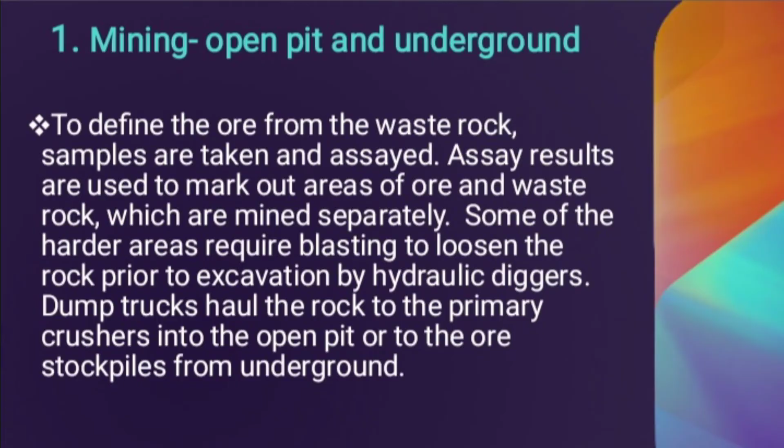The process of mining. First one is mining, open pit and underground. To define the ore from the waste rock, samples are taken and assayed. Assay results are used to mark out areas of ore and waste rock, which are mined separately. Some of the harder areas require blasting to loosen the rock prior to excavation by hydraulic diggers. Dump trucks haul the rock to the primary crushers into the open pit or to the ore stockpiles from underground.

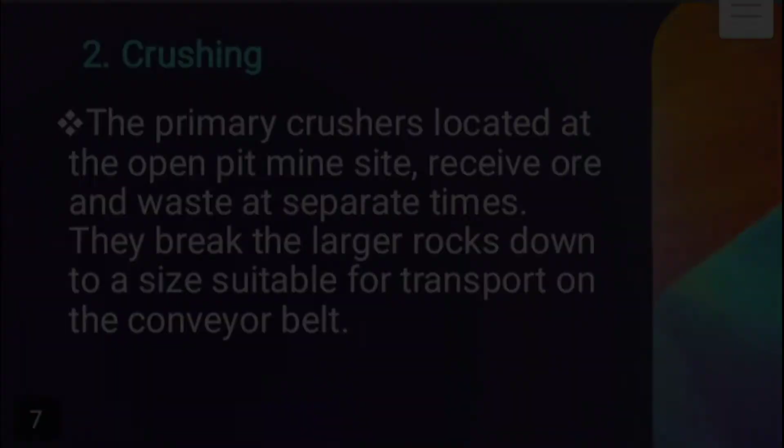Second one is crushing. The primary crushers located at the open pit mine site receive ore and waste at separate times. They break the larger rocks down to a size suitable for transport on the conveyor belt.

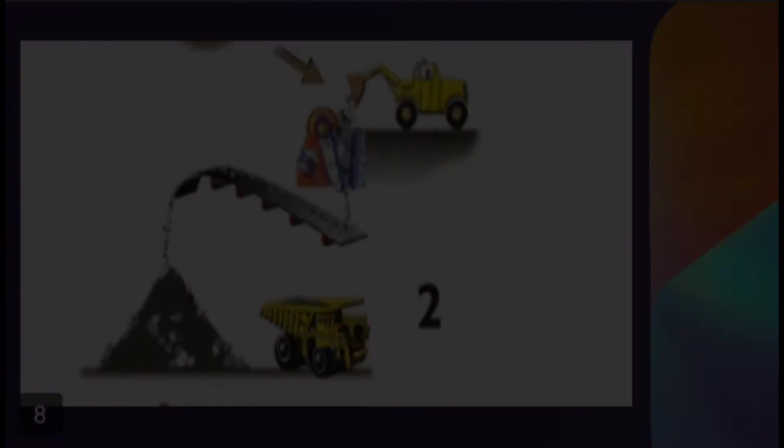Third one is transport. A rubber-belted conveyor transports the ore and waste rock from the open pit, approximately 2 kilometers, via a tunnel through Union Hill to the mill and waste rock embankments. Large electromagnets remove any steel debris excavated from the old Martha mine workings.

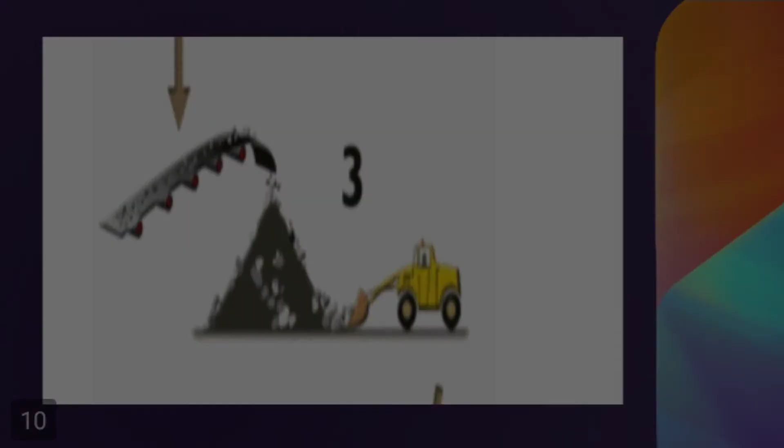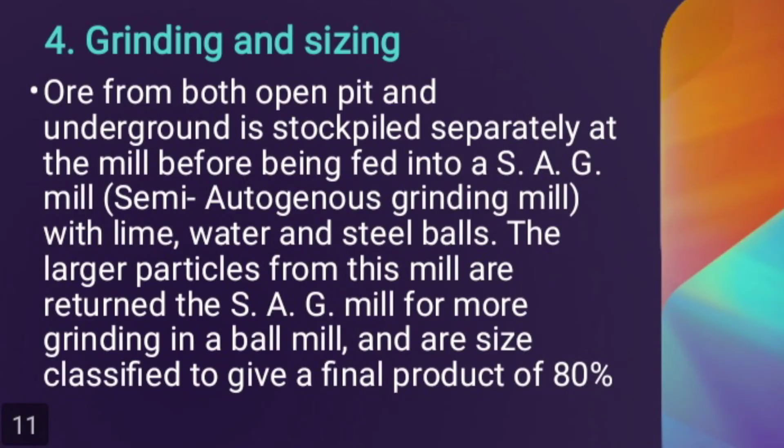Fourth one is grinding and sizing. Ore from both open pit and underground is stockpiled separately at the mill before being fed into a SAG mill with lime, water and steel balls. SAG is an acronym for semi-autogenous grinding. The larger particles from this mill are returned to the SAG mill for more grinding in a ball mill and are size classified to give a final product of 80%.

Five is leaching and adsorption. A slurry of ground ore, water and a weak cyanide solution is fed into large steel leach tanks where the gold and silver are dissolved. Following this leaching process, the slurry passes through adsorption tanks containing carbon granules which adsorb the gold and silver. This process removes 93% of gold and 70% of silver.

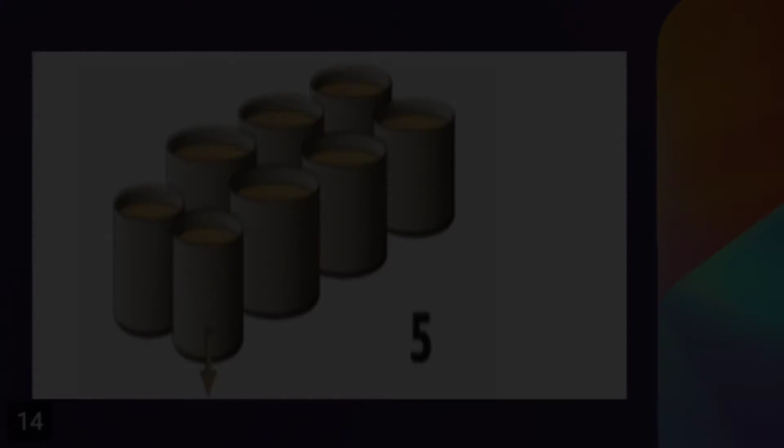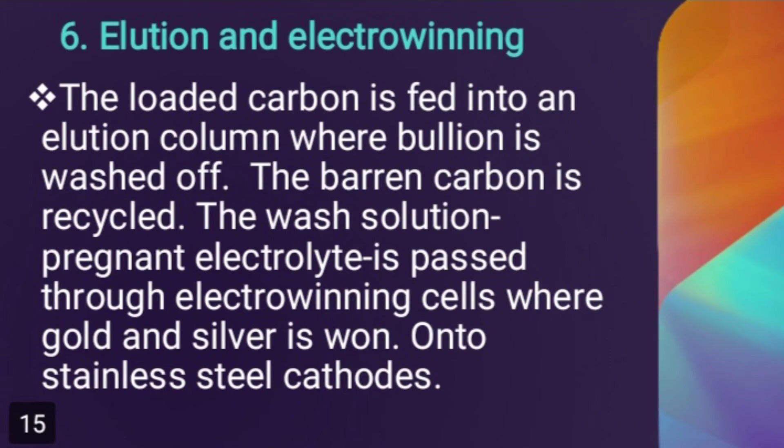Six is elution and electrowinning. The loaded carbon is fed into an elution column where bullion is washed off. The barren carbon is recycled. The wash solution, pregnant electrolyte, is passed through electrowinning cells where gold and silver is won onto stainless steel cathodes.

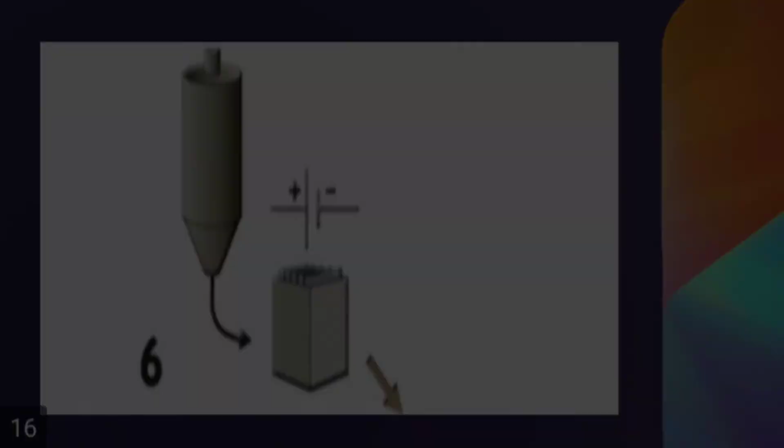Seven is bullion production. The loaded cathodes are rinsed to yield a gold and silver bearing sludge which is dried, mixed with fluxes and put into the furnace. After several hours, the molten material is poured into a cascade of molds producing bars of bullion.

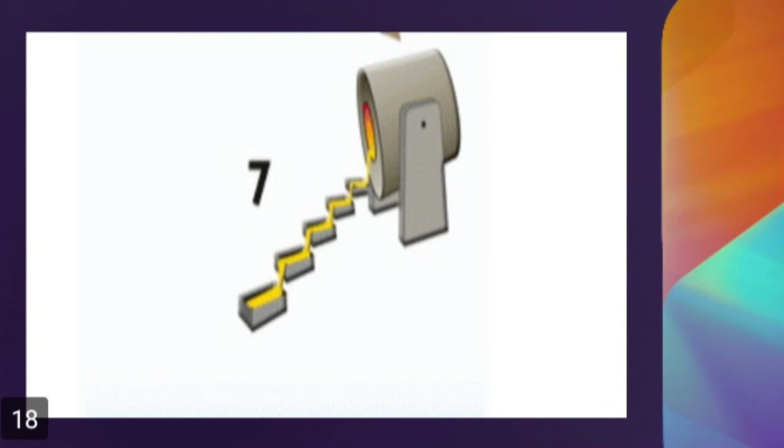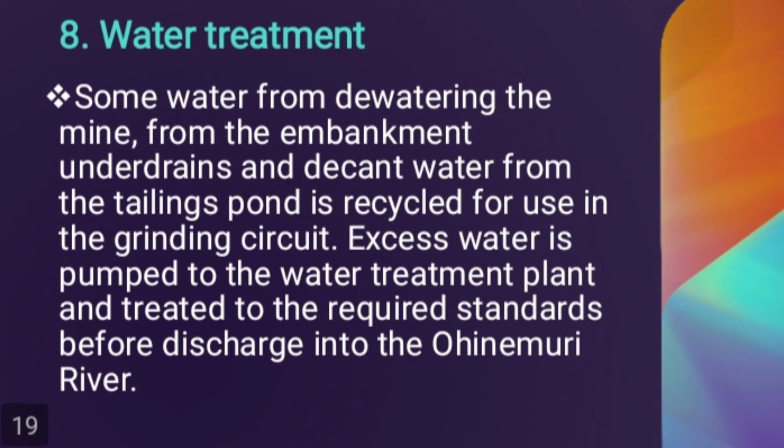Eight is water treatment. Some water from dewatering the mine, from the embankment under drains and decant. Water from the tailings pond is recycled for use in the grinding circuit. Excess water is pumped to the water treatment plant and treated to the required standards before discharge into the Ohinemuri River.

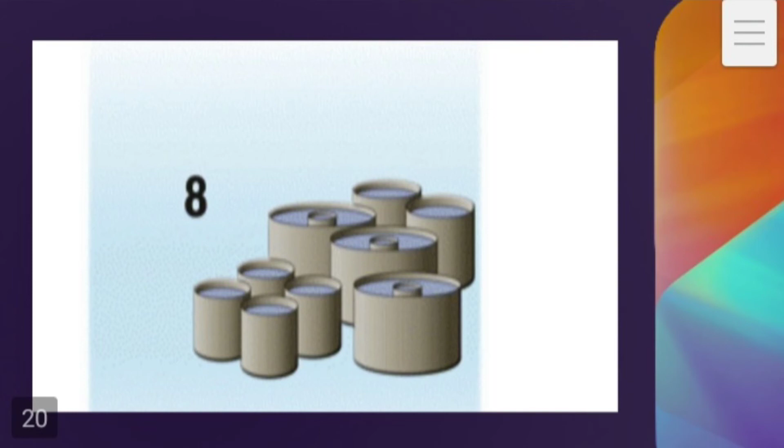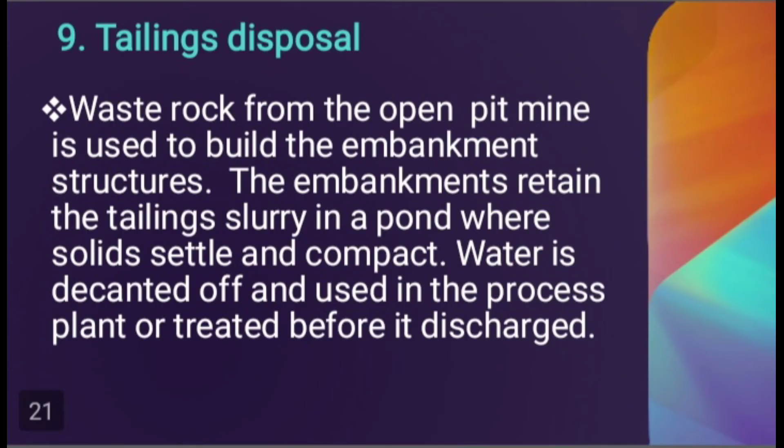Nine is tailings disposal. Waste rock from the open pit mine is used to build the embankment structures. The embankments retain the tailings slurry in a pond where solids settle and compact. Water is decanted for use in the process plant or treated before it is discharged.

So this is the process of mining. First one is mining, open pit and underground; this is to define the ore from the waste rock. Second one is crushing, the primary crushers located at the open pit mine site. Third one is transport; a rubber-belted conveyor transports the ore and waste rock from the open pit. The fourth one is grinding and sizing. Ore from both open pit and underground is stockpiled separately at the mill before being fed into a SAG, or semi-autogenous grinding mill, with lime. The fifth is leaching and adsorption. A slurry of ground ore, water, and a weak cyanide solution is fed into large steel leach tanks where the gold and silver are dissolved. Number six, elution and electrowinning. The loaded carbon is fed into an elution column where bullion is washed off. Seven, bullion production. The loaded cathodes are rinsed to yield a gold and silver bearing sludge, which is dried. Number eight, water treatment: some water from dewatering the mine. And nine, tailings disposal, which is waste rock from the open pit mine used to build the embankment structures.

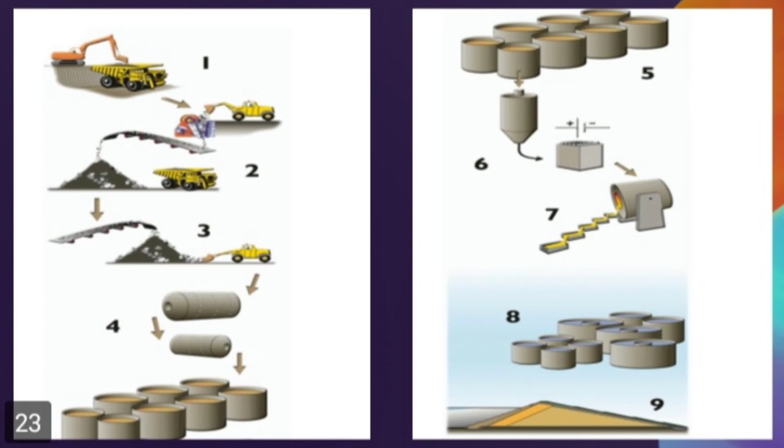Digging deeper: mining methods explained. Open pit, underwater, and underground mining are the three main methods of mining we use to extract our products from the ground. In this Digging Deeper article, we take a look at these different methods and provide a glimpse into what each involves.

Number one, open pit mining. Open pits, one of the most common mining methods, start from the Earth's surface, maintaining exposure to the surface throughout the extraction period. The excavation usually has steps to ensure the safety of the miners and a wide ramp where equipment can travel, allowing the product to be removed efficiently from the site.

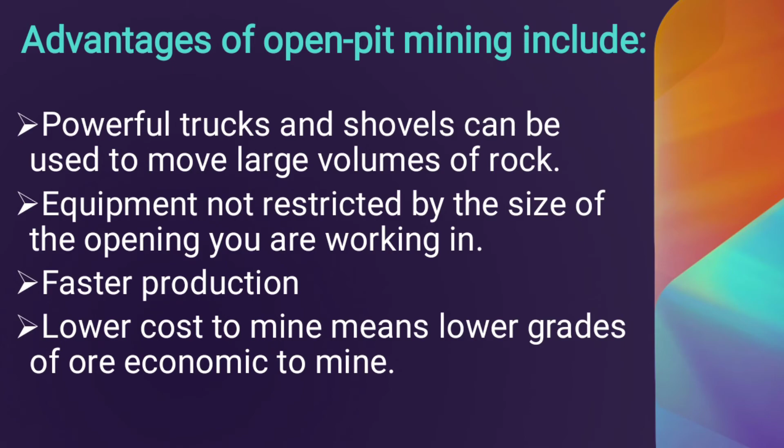Underground mining is used to extract ore from below the surface of the earth safely, economically, and with as little waste as possible.

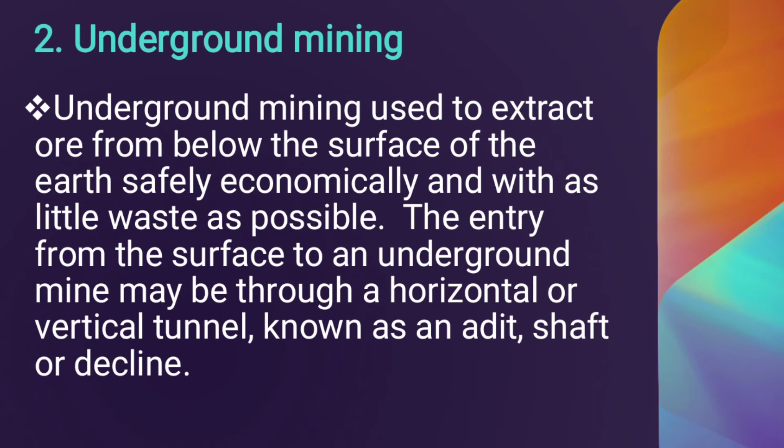The entry from the surface to an underground mine may be through a horizontal or vertical tunnel known as an adit, shaft, or decline.

Underground mining is practical when the ore body is too deep to mine profitably by an open pit, when the grades or quality of the ore body are high enough to cover costs, and it has a lower ground footprint than pit mining.

What is underground mining? The underground mining methods used include room and pillar, narrow vein stoping, and large-scale mechanized mining.

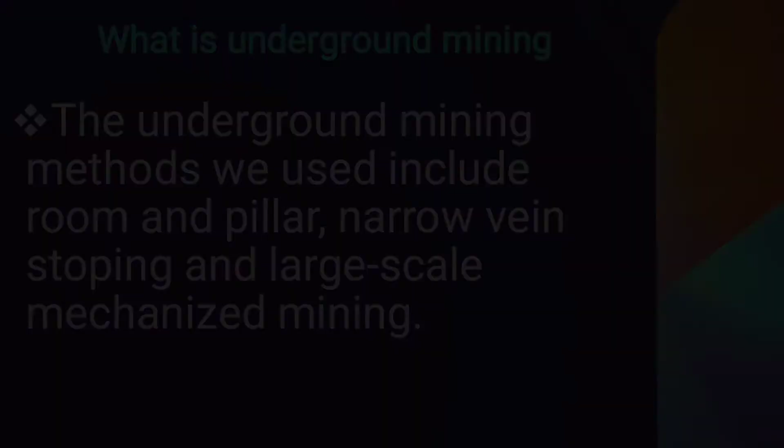Room and pillar mining is a style of mining where tunnels are driven in a chessboard pattern with massive square pillars between them, which are gradually cut as the work proceeds. We use this for coal mining.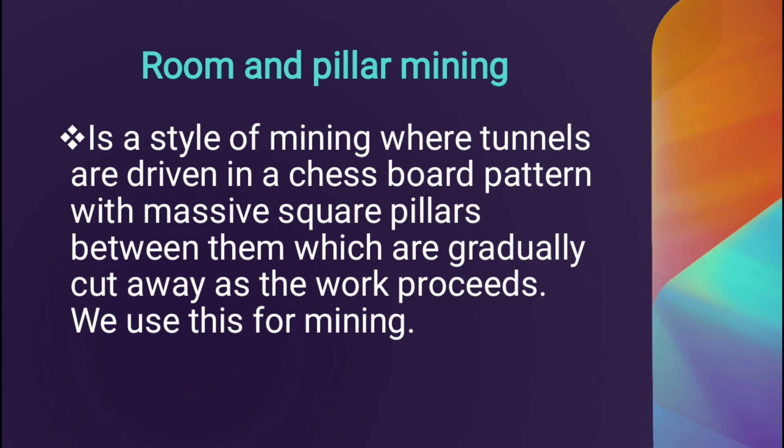Narrow vein stoping is performed in an underground excavation along geological veins, distinct sheet-like bodies of crystallized minerals within a rock, where the minerals are mined and removed.

To support underground mine stoping, we also have to make excavations for engine rooms and pump chambers, or for access purposes, such as shafts, drives, winzes, and raises. We use this for mining platinum.

Large-scale mechanized mining includes long wall mining, where a long wall of coal is mined in a single slice, usually by a large machine.

Sub-level caving, where levels of the ore are blasted by explosives. Block caving, where large areas of the ore body are blasted and extracted with the assistance of gravity.

Underwater mining is necessary when the product you've identified is located within an aquatic environment like the seafloor. It's a unique challenge, one that requires a responsible approach that thoughtfully considers the local ecosystem.

We conduct underwater mining with purpose-designed ships using either a remotely operated underwater vehicle or drill technology, at depths of 100 to 400 meters below sea level.

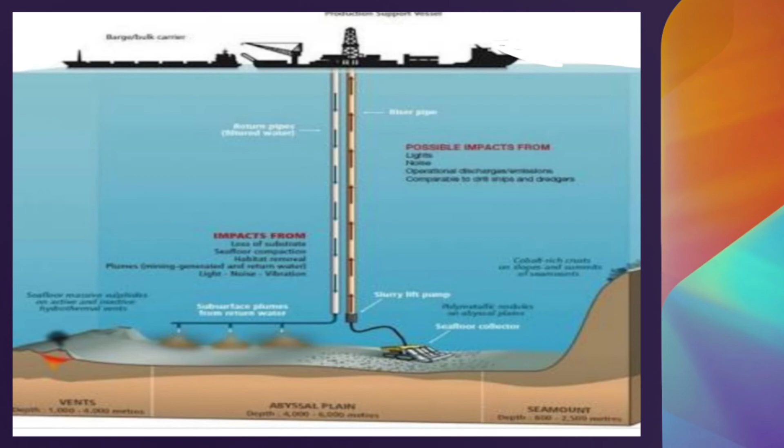In situ leaching is also called in situ recovery or solution mining. It is a mining process used to recover minerals such as copper and uranium through boreholes drilled into a deposit.

It works by artificially dissolving minerals occurring naturally in a solid state.

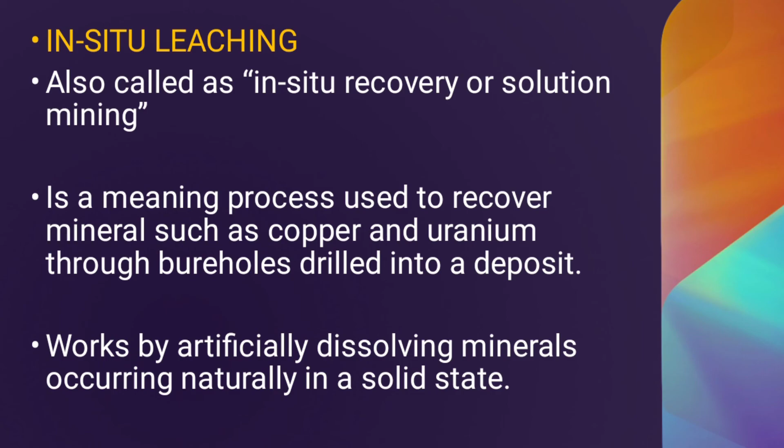Milling is the process of grinding, cutting, pressing, or crushing a material in a special machine. It is a process that can be done with a wide range of machine tools, using rotary cutters to remove material by advancing a cutter into a workpiece.

It is also known as fine grinding, pulverizing, or comminution. It is distinct from crushing or granulation, which involves size reduction to a rock, pebble, or grain size.

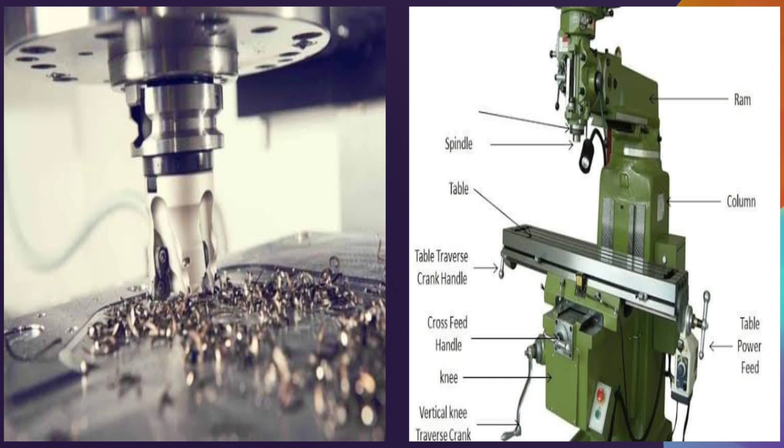What are the methods of milling?

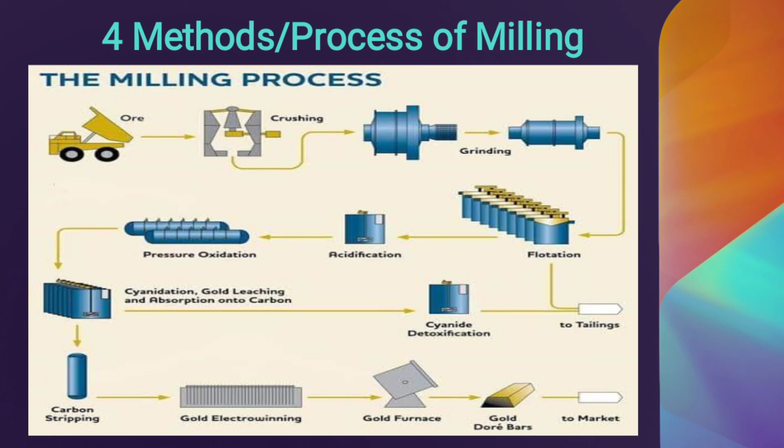String milling is quite similar to single-piece milling, but the only difference is that instead of a single piece, there are several parts which are simultaneously fixed and worked upon.

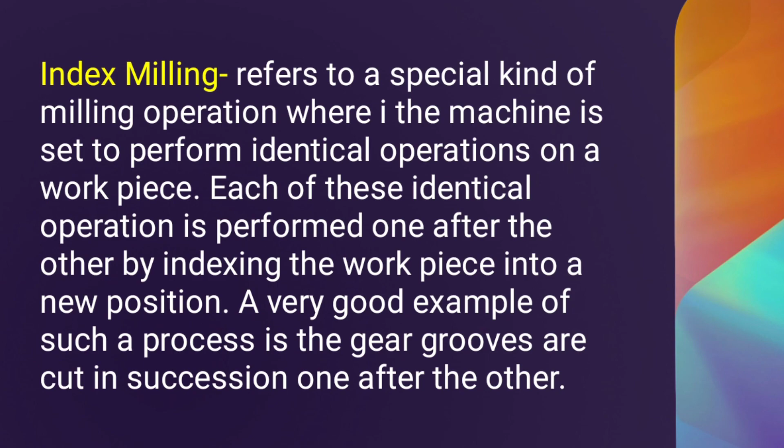Index milling refers to a special kind of milling operation wherein the machine is set to perform identical operations on a workpiece. Each of these identical operations is performed one after the other by indexing the workpiece into a new position. A good example is where gear grooves are cut in succession, one after the other.

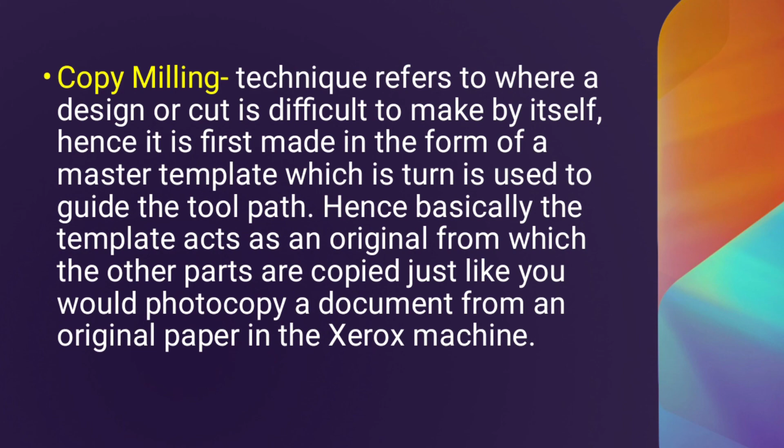Copy milling technique refers to where a design or cut is difficult to make by itself. Hence, it is first made in the form of a master template, which is then used to guide the toolpath. Basically, the template is an original from which the other parts are copied, just like you would photocopy a document from an original paper in a Xerox machine.

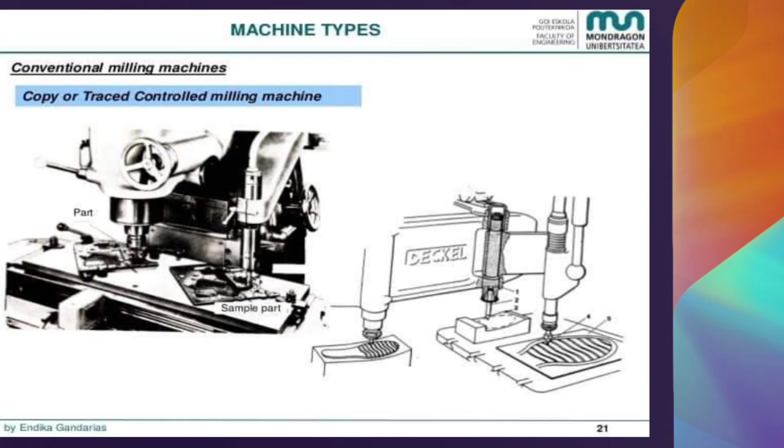Gang milling refers to the situation when a gang or group of cutters is used to simultaneously work on the workpiece in order to produce the desired shape.

Single-piece milling is used for milling a single job work which is held on the milling machine. It's important to note that the piece has to be worked in a single machine cycle for it to be classified under this category of milling methods.

Reciprocal milling refers to the process wherein the time taken to load and unload the job work from the fixture on the milling table is minimized by utilizing two fixtures which are ready at the same time for milling, one after the other.

There are several other types of milling methods apart from these, and each of these methods has its own unique features.

So, the differences between mining and milling: mining is the process of getting minerals in the soil by the use of digging. Milling is the process of grinding minerals into smaller pieces. They both involve extraction of minerals.